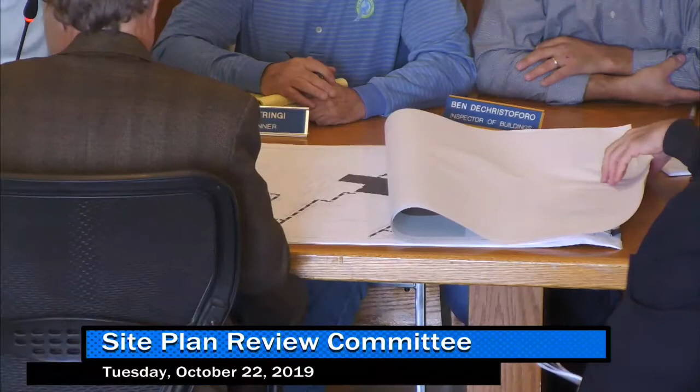So the plan is to demolish—let's just go find the site plan here for a moment. So we would be demolishing the first floor and the roof of this section of the building. We're also removing the existing stage. Are you talking about interior demolition or exterior? Interior and exterior, both. Yeah, so that whole level is coming down.

Yeah, it's coming down to grade. We discovered in the course of our investigations that this portion of the foundation is pretty dicey, so that's going to have to be replaced.

It's also, the building has remnants of the old restaurant. It's got this bar here with a sunken floor in it—that's going to go away. And there's some dumbwaiter here that needs to get out of the way for planning purposes.

So those are the principal issues there. Oh, in this area, this whole area of the basement was pretty much a mess. It's been cleaned out somewhat, but it's still a maze of partitions and small spaces. There's no extension of the existing structure.

The only extension is that this wall is skewed about 9 inches relative to this wall. The proposal is to straighten that wall out, so at least for this stretch we can have all the bar joists be the same dimension. But it stays within the footprint of the property line. This is a corner lot.

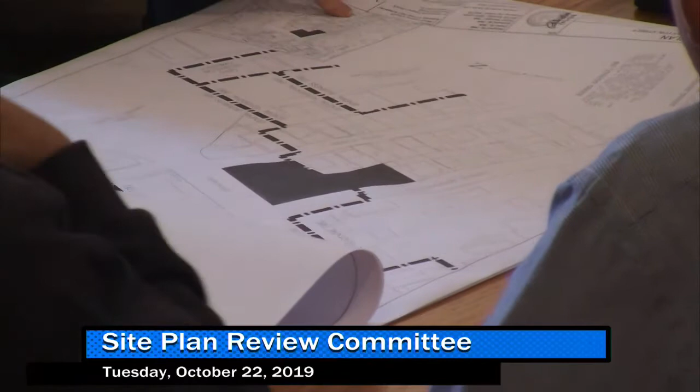Yeah, so you can see right here that it skews a bit, and straightening it out doesn't bring it quite all the way to the property line. I think we're still 14 inches back at that corner. And you're bringing this up to the same elevation? Yeah, essentially, yes.

Wasn't that essentially the same plan as last time? Yep. Yeah, that hasn't changed since the last time you saw it. Okay, interior space. Yeah, interiors.

Can I see this real quick, please? Yep, second floor demo—yeah, so basically that all comes off. This is the construction that we have here, and we discovered that whatever footing it is, it's about a foot below grade. I think there are some piers that go down further. But this is the front part of the basement where there is a full foundation.

So this is a structural interior wall? Yeah, this portion, I believe, was built in the late 80s or 90s, so this is steel frame, bar joist construction. Over here is wooden, largely wooden construction. Some beams have been introduced to remove bearing walls, but it's all wooden construction. We propose to replace that structure with modern steel.

So the proposed plan will include some rearrangements. We're going to move the pastor's office down here closer to the entrance, so the pastor and secretary will be here. This will be lobby space.

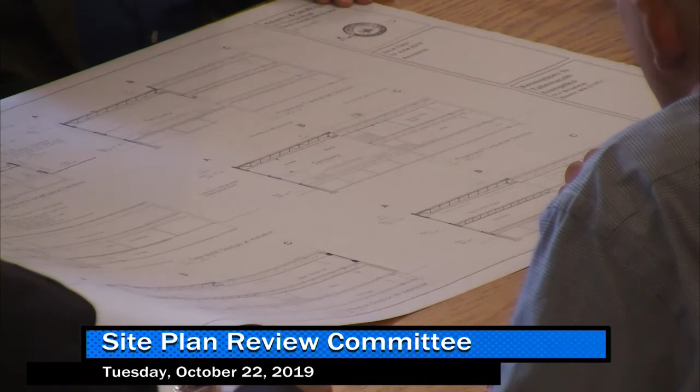Has there been any change to the overall site plan, the parking areas, or anything? Has that been constructed already? Yes. Is it completed with that second egress gate and everything else too? No, I think the second egress gate, we're waiting on that.

We have a little problem with the design of the stormwater detention system. So we've met with the contractor, J&M Builders, Joe McGonigal - you might know him. He's been working with us for many years. We've met with him, and Peter Blaisdell.

You know, you're on vacation.

So that will be the only thing we need to finish up. We're getting a couple of cites from the building inspector's office, saying it's an unkept area. That's why the back part hasn't been done, because you're looking for some kind of retention system.

Yeah, I mean, it's always been thought that somewhere along the line you made the decision to knock down the garage, and that turned into lefts and rights, and I wasn't involved in certain parts of it, but now I am.

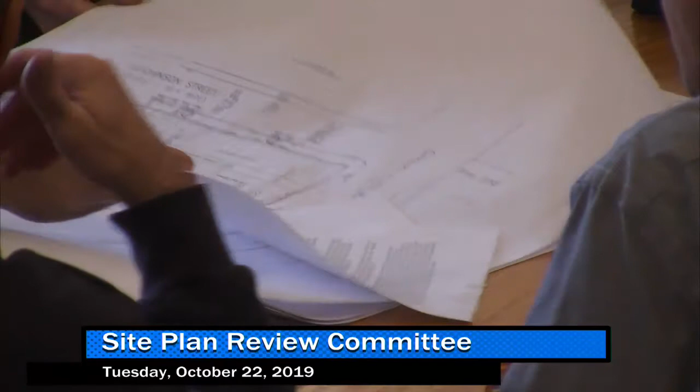But you have an improved parking plan. We do, address that. We have two curb cuts. Yeah, very fair. This is the approval that we got from your office on the parking plan and so forth.

So this might change, right? I think that he might be able to park with that once Peter's done. Back to where the garage used to be. Yeah, and this has turned out to be, it's just not working the way it was. So Peter went back in there, re-engineered the whole thing.

So the buffer zones aren't changing or anything? No. All right, so here's your gate — it isn't built yet. Right, because I've been by and noticed that. All right, so this is your other egress, which is out of the building now.

So now you've got tandem parking right outside the egress. Are you maintaining my 10-foot path to the public way? Okay, well, that means we've got to mark that off on the site to make sure it looks right. So just add that to the list of review. Yeah, okay, because I don't see my path to the public way.

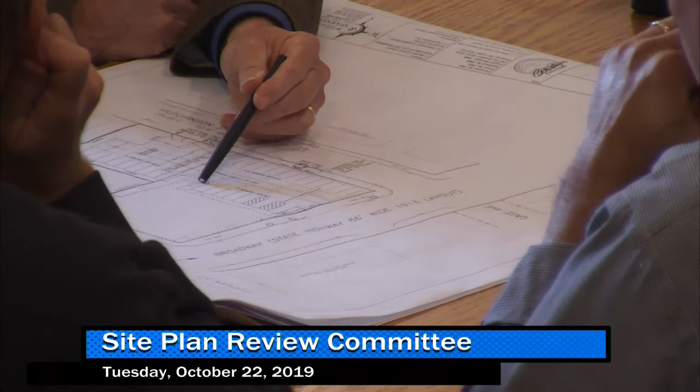Okay, now looking to take that grass away and make additional parking, we need to address that. What we might want to look at here — the property line runs back here, and this may be a discussion with the neighbor — but you could make an egress path out to Beach Road there. That's one possibility. Another would be to rejigger this and have a marked band across here, no parking on this band, that takes you straight out to the street.

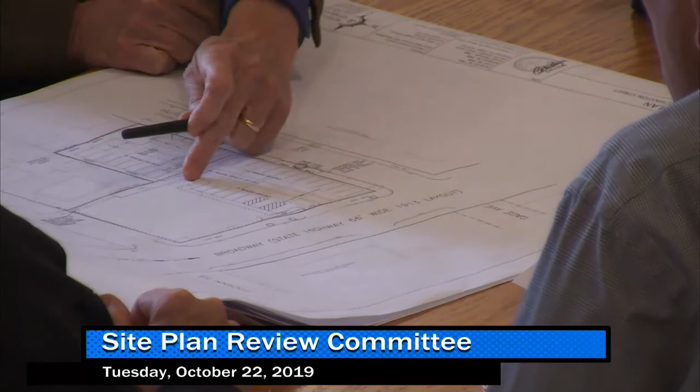So I think — actually the way that Peter has marked off parking spaces here, it looks like there's a path along the side of the building. Does it meet the width though? So you're looking for 10 feet. If you tell me the code says something different... So what you're looking for really is a code way to bring emergency compliance vehicles in.

So why don't you develop your plan, and once you submit the drawings, we'll comment on it. All right, I'll pass that one back to Peter. Deputy, you should know that they have historically been allowed to park on this plan, but certainly I'm sure there's this — understood, but that doesn't circumvent public safety, or exiting the building during an emergency. It's a place of assembly, special.

We're also increasing the density. And if we can somehow get by the problem here, we'll have a little extra. Things around — yeah, okay, we'll talk with Peter about that. I'll have an answer for you. All right, so there'll be a new site plan review issued on — proceed with the site plan review.

You just upload the changes to the parking lot — if you add more spaces in, include the 10-foot public way, unobstructed public way.

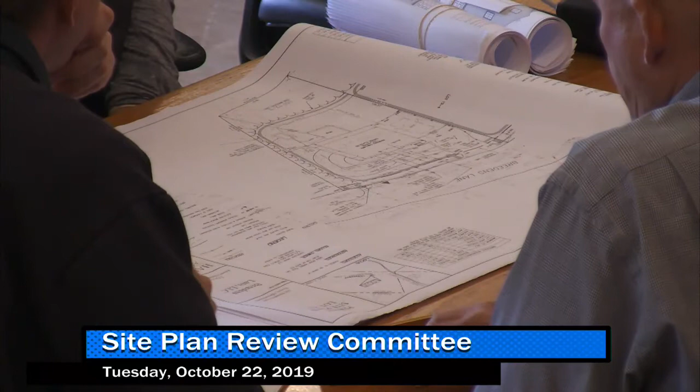Are you done clearing this lot? We are. Did you maintain any trees in front? There were no trees in the front, it was all brush. There was a home here, it was dug out and the foundation was removed.

This one's pretty brushy, it got too long. We took down a couple, a few dead ones. So you took a lot of trees down, so the standard is 2 trees, we may require 4 or 5 street trees in this section, or as many as you...

Probably be doubling them up, 4. Okay. If there's room, I don't know if there's room, but 6-inch gauge. Plenty of room, easy with that. 1, 2, 3, 4, we got walkways, we have water coming in, we have hydrants. It'll be busy. All right.

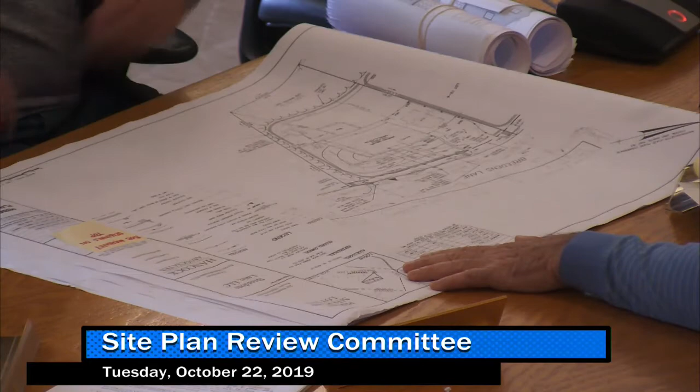Okay, the site plan letter's already been done for this, so I'll need a copy of this, the new revised one. I have stamped ones for Nick, and I have copies. And your foundation plans match the house plans? They do, yes, that's correct.

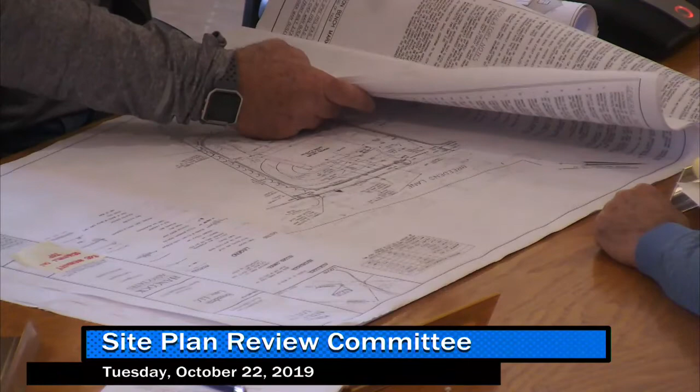So is this uploaded already? This plan is not uploaded yet, no. You want me to forward it to you, or you want to take this? No, if you can upload it when you get a chance. Are you the only one that keeps a hard copy file on it? Yeah.

And you want a copy of the plan, Frank, or you have it? I think I have the house plan, yep. Okay, all right, let's hit that. That's it. All right, gentlemen.

Just keep in mind that I'm gonna be looking for the water line to be done ahead of this. Well, I'd like to be doing that as we go along. How are you gonna do it as you go along? This doesn't require any water replacement over here. This is already in the 10-inch water line area. This is totally separate from the other 8 lots, so it's beyond the park, beyond the scope of the water work?

Correct. Alright, so then the ones that are within that scope, the water line needs to be done first for those. Well, I'd like to request to be able to do the water line at the same time as we build. How are you gonna do an entire street of water line at the same time? Well, as we begin one lot, we'll be doing the water line at the same time. One of the lots down near my house - when you're ripping up, going after the foundation, we'll go in the street and run the water.

So he's not just saying water, he's replacing the main line, the whole street. Yeah. Generally, utilities are required to be done ahead of the lots, like we've done in the past with Walnut over on Liberty. Is it fair to say that the water line will be installed before occupancy permits are issued for this? That is correct, yes. No condition, no occupancy permits until that's done.

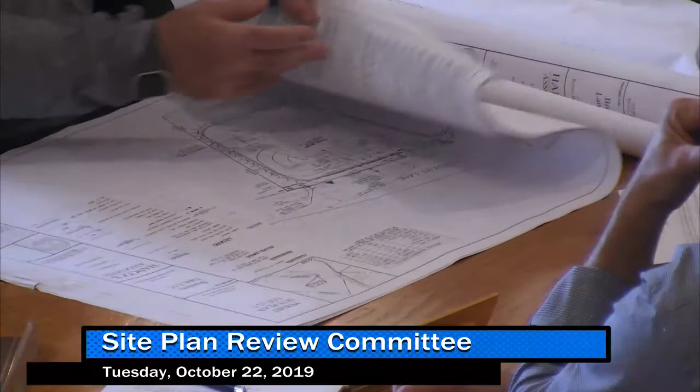So I'll show you the right ones. There's 2, just double check. Do we have Verizon Wireless here? All right, thank you. Thank you. See you later.

You want to come on up for your mounting brackets and antennas? This is at 124 Crystal Ave, 151 VFW Parkway, and 10 Walnut Ave. Correct.

This is mounting to existing utility poles? Utility poles, yes.

The Deputy Fire Chief - you just put you on the spot. I don't know if you... So what are you saying, mounting brackets? What are proposed mounting brackets? So is this small cell? It's... small cell. All right, is it small cell or is it just mounting brackets for right now? When you say - okay, it is, I'll show you.